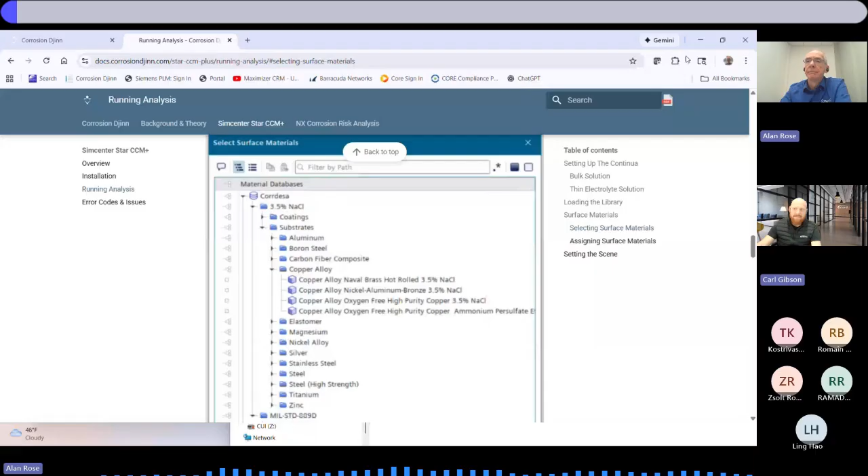So what I wanted to do, I'm from Corrdesa, based in the USA, and that's me on the left. My background is computer-aided engineering, so I've done a lot of computational fluid dynamics, whether it's in nuclear, aerospace, or whatever. And we started Corrdesa in 2011, with Keith, the co-founder.

His expertise is in coatings, materials, and reduction of hazardous materials. We've worked a lot with the Department of Defense on corrosion panel advisory boards to look at strategies for reducing content of chromates and so on.

That's his expertise. And then another one of our partners, Siva Palani, he's from Airbus, Nissan, so aerospace and automotive experience. A lot of experience in electrochemistry and the simulation of electrochemical processes, whether it's plating, electroplating, electrochemical machining, or today we're going to talk about corrosion. So that's a bit of background on our company.

So what I want to do today is share some of the corrosion prediction methodologies and software tools we've developed, as well as hardware and various coating repair processes. I want to try and cherry pick some of these learning experiences to share with you. Hopefully some of it will be new and interesting information.

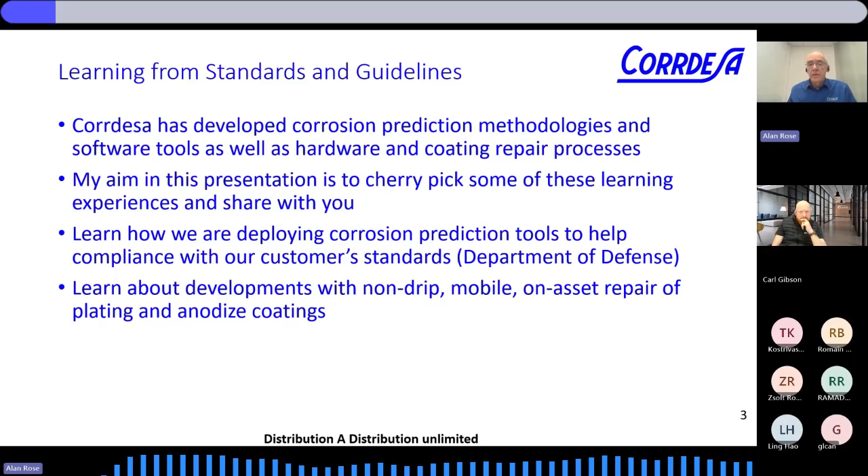On the other side as well, we have sustainment and hardware, and how do we actually repair some of these coatings that we've specified. Thought that might be interesting, on how we're doing on-asset repair. So this is our world, and we have experience in the sustainment side.

I'll talk a little bit more about these little machines here that look like little robots. Essentially, they're mobile machines. You can do electroplating with them. They have tools that are non-drip, and you can take them right up to the asset, whether it's a smaller version in a submarine or on an aircraft, or bring it right up to the plane. But working with our customers, such as the Air Force and Navy, we see a lot of issues.

So it's great to see these actual challenges that our customers have and help them try and remediate those corrosion issues. But many of the issues could be avoided by a better choice of design and materials.

So we developed over the last few years software tools, and we've integrated these capabilities into commercial CAD tools in order to assess and look at corrosion risk very early on in the design process.

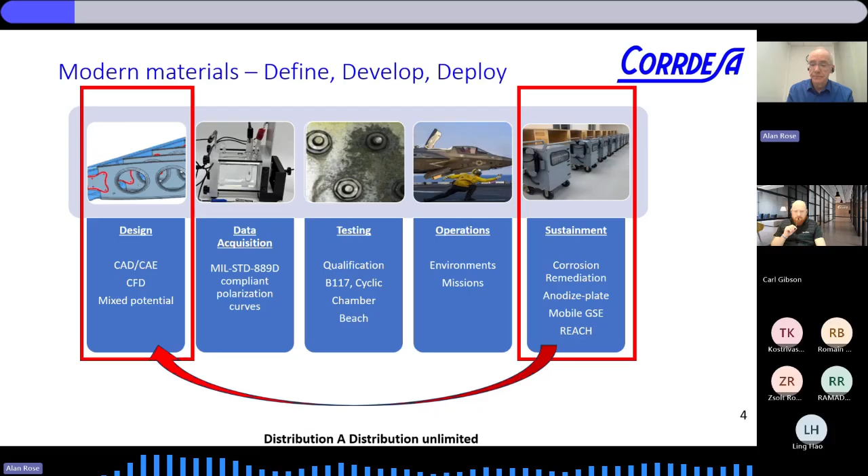Point out these other aspects as well. When we started doing this, we realized, unlike if you're doing computational fluid dynamics, a lot of those properties are already available in CFD software. So that path has been beaten already.

When it came to corrosion, there was very little data to use in our models. So we spent quite a while, we created a panel where we worked with companies like Boeing, Safran, some academic people and federal agencies, and came up with a data acquisition protocol to ensure that the data was gathered in a consistent and robust way. I'll come to that in more detail later on.

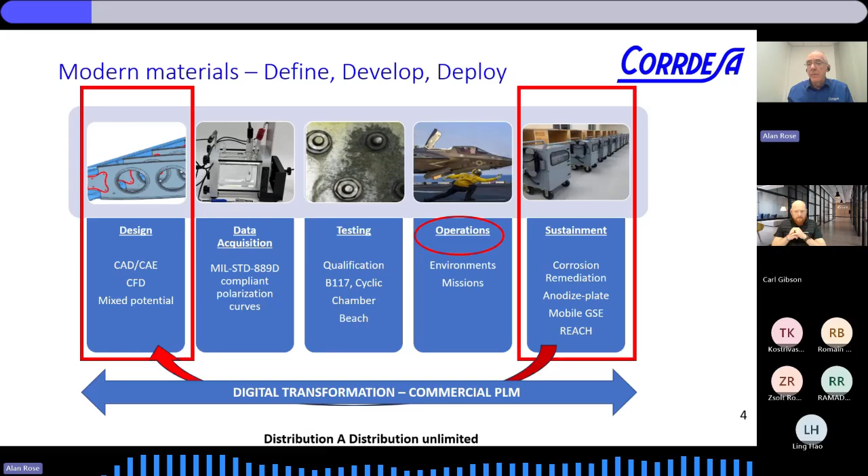So we do a lot of data acquisition. We're very familiar with the testing. We can simulate these testing environments as well. And of course, people work in different environments and also have different missions for their assets, so we've incorporated capability to look at the impact of different environments and different missions.

So it's a big problem in aerospace. It's a readiness problem. If you have an aircraft on the ground, it can cost you a lot of money, whether you're trying to fly your people off to sunny Spain or it's a jet fighter that needs to get in the air at a moment's notice in terms of mission readiness.

Obviously, civilian or military has an impact on structural integrity and safety. And presently we rely a lot on very prescriptive standards and a lot of inspection. I think there's a lot of room for incorporating prediction methodology into condition-based maintenance.

It's relevant also to automotive. We're getting a lot of traction now in the automotive area. They cover their cost in the warranty, essentially. So if they can reduce corrosion costs, that would have an impact on what they spend in their warranty. And there's always an interest in increasing the platform longevity, because they like to use the same platform for different models of cars.

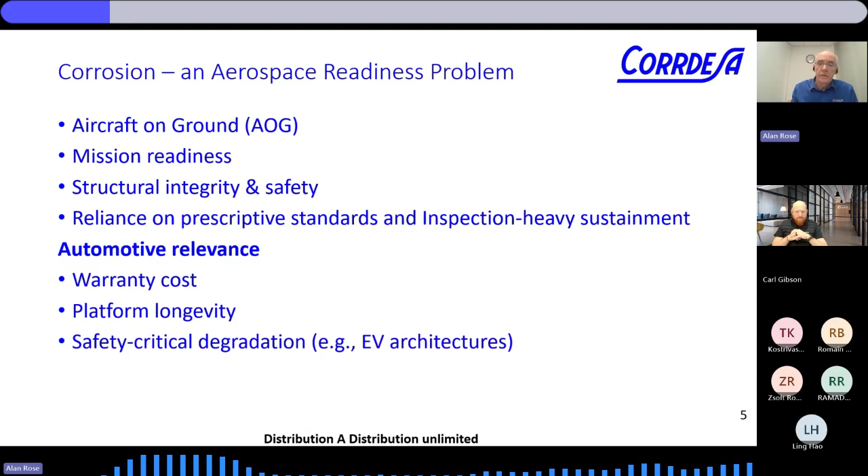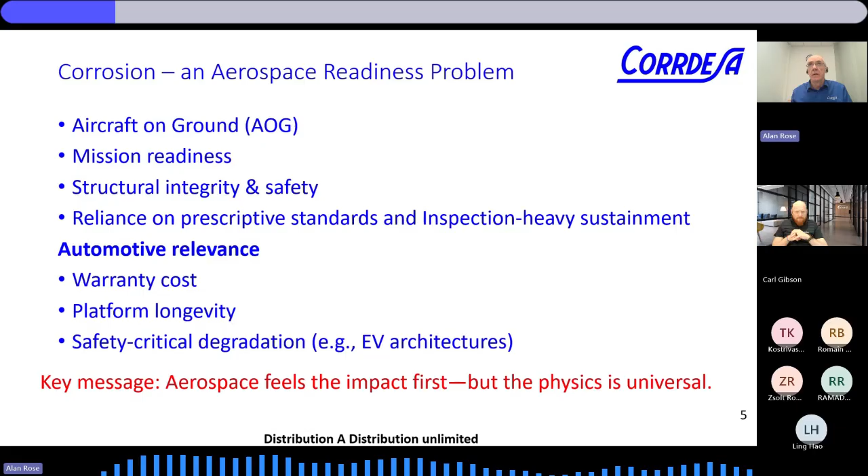And again, safety and degradation of materials. There's new problems with EV architectures as well, stray currents and such. So the key message here is, although we worked in aerospace first and it felt the impact first, in terms of what can we do out of software and prediction, the physics are universal.

So in aerospace, cost of corrosion is huge. Internationally, across all industries, it's huge. And probably teaching you to suck eggs here, you're probably very familiar with these numbers. A couple of things I will pick out is in the FAA, a report said 23% of their failures trace back to corrosion-related issues, which is, I find, quite a large number.

Another thing, when people are always saying, why did this happen? Why was this specified in such a way in the design? 70% of your sustainment costs are locked in by the decisions you make in design. So you need to have the best data you can and do the best job you can in design, because you have to live with them for a long time.

Certainly in the aircraft industry and in the military, these platforms last for decades. And another thing is the coating legislation changes over time. So when we come back into depot maintenance and you want to recoat with cadmium, you might not be allowed to do that. Now you have to recoat with something else, something less hazardous, which has to be tested and qualified, and simulation can speed up that process. It takes more than 10 years to deploy new coatings.

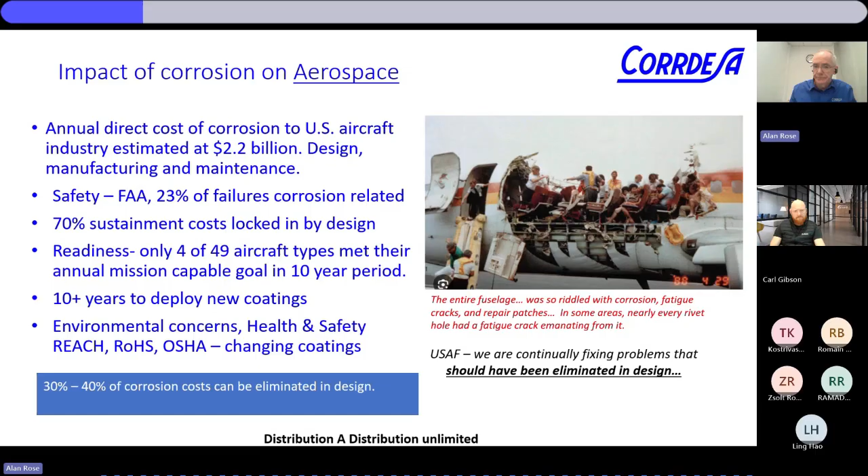So there's parallels in automotive, and we're beginning to get traction in the automotive side as well now. Maintenance cost, a good fraction of maintenance cost in cars is due to corrosion. They have the same issues in terms of changing legislation, meeting REACH, RoHS, OSHA kind of EPA compliance requirements. And there's some new issues coming now with battery casings and connectors and cooling systems for electric vehicles.

So why are we seeing this now? Obviously, in automotive design, they're using very exotic materials, just like they use in aerospace. We're always chasing power, performance, and lightweighting. I have to keep safety in mind, of course, but it's important to reduce the vehicle weight. And also with EVs, the batteries are so heavy. The more we can make use of light alloys and composites, the lighter you could make your product.

But this introduces a lot of complexities in terms of protecting for corrosion, designing those fastener systems in such a way that you don't increase the galvanic corrosion risk. So all these materials expand and corrode differently, they fatigue differently. So testing is the traditional way and is a requirement of physical testing. But what we've done is developed some software methodologies and tool techniques that can simulate these tests, simulate these materials in the field, and can reduce that whole process. I'll introduce some of them to you shortly.

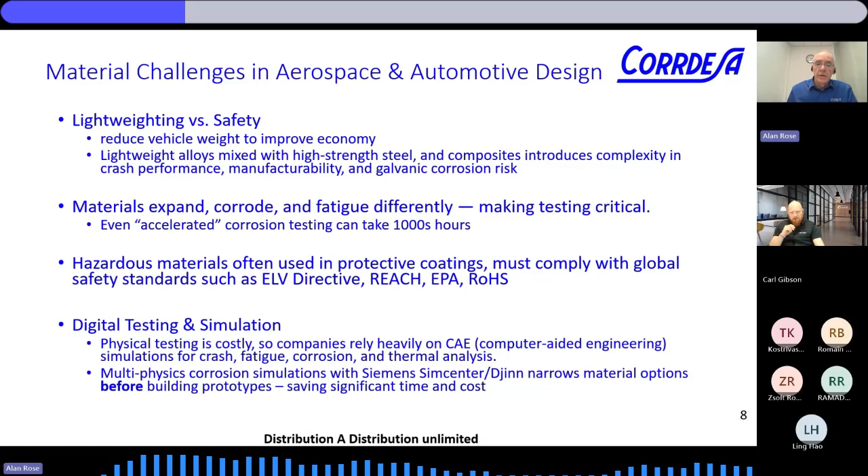You'll have heard of digital transformation. Large enterprises are looking at how they can simulate more, you've heard of digital twins and such, so they can do things quicker, more upfront, shift left. Physical testing is costly, and even if it's accelerated testing, it still takes a lot of time. So I'm going to show you some of the things that we've done with the simulation tools that we've developed.

So often testing happens too late, rules of thumb don't scale. And another thing about simulation is that because you're set up digitally, there's a good auditable trail that you can create, so you can look at exactly what you've done. You can manage all of this process. You've not got your data scattered around in spreadsheets and so on.

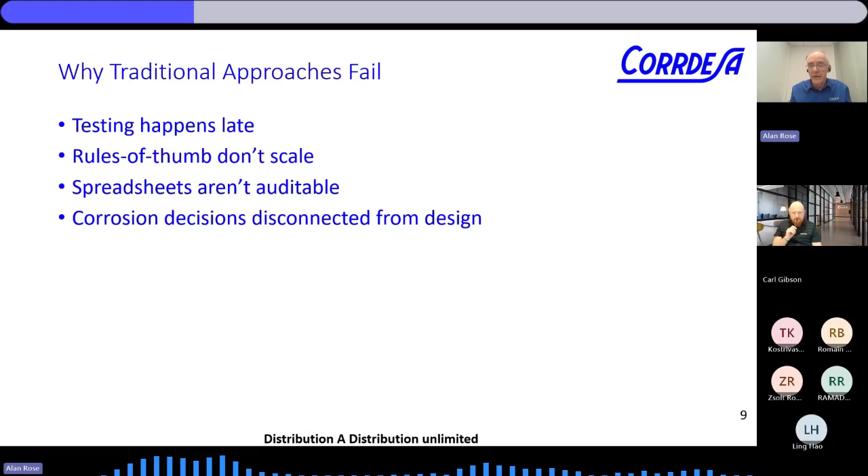So you connect your material choices, and the corrosion risk is connected to the design and travels with that design. So we'll avoid designers flying blind. So here's an example: there are many mechanisms of corrosion.

We started off with galvanic corrosion simulation. The Navy put out a bid, a request actually, for information: can we model galvanic corrosion? Just like thermal analysis, stress analysis, that was the idea.

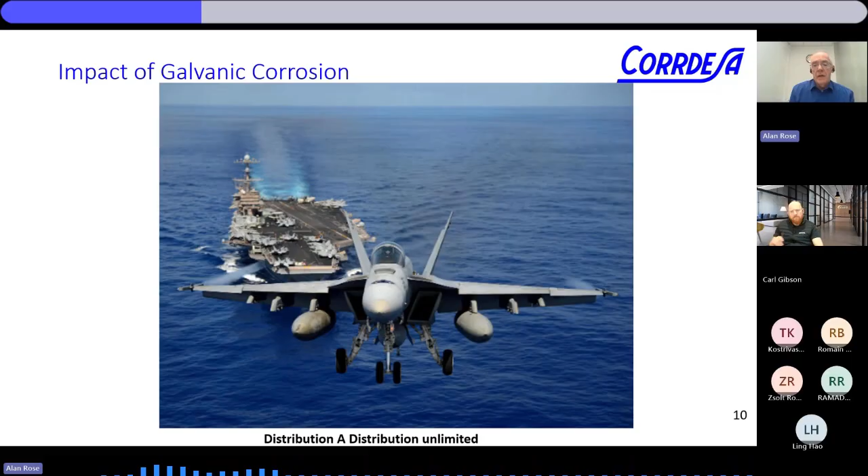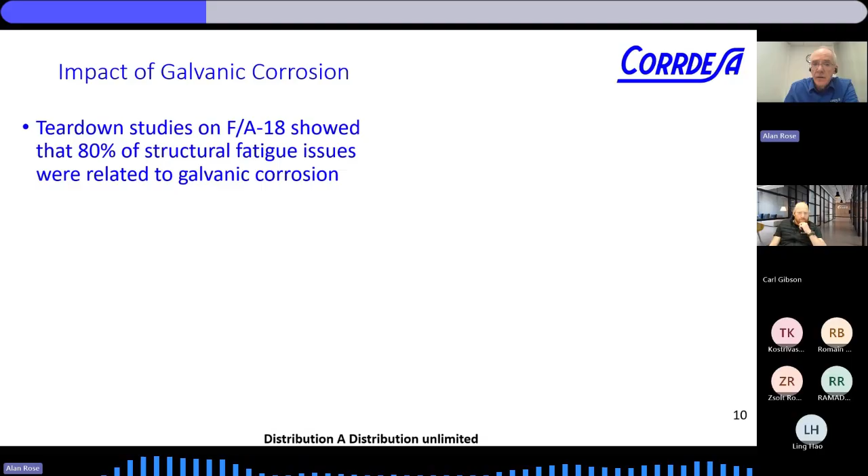And the reason they chose that is just eating the proverbial elephant, it's like, well, what hits us most? In teardown studies on the FA-18 from Top Gun, they showed that 80% of the structural fatigue issues were related to galvanic corrosion. So if you lift the composite skin off the airframe here, you got very nasty corrosion interaction between the composite skin, the aluminum alloys, and the fastener systems as well.

So this led to a real readiness issue, as low as 50%. What's readiness? That means at any point in time, only half of my fleet are able to go and fight. So obviously that was a big event, and there's lots of other issues that cause and lower the readiness, but the corrosion was certainly one of them.

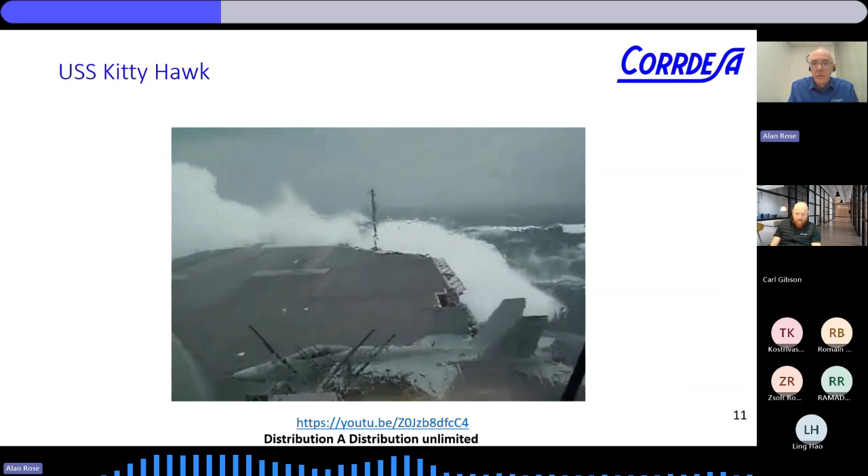And it's not surprising when you look at this, the hostile environments that the Navy had to cope with is kind of mind-boggling, really. They dump tons of seawater onto these helicopters and planes.

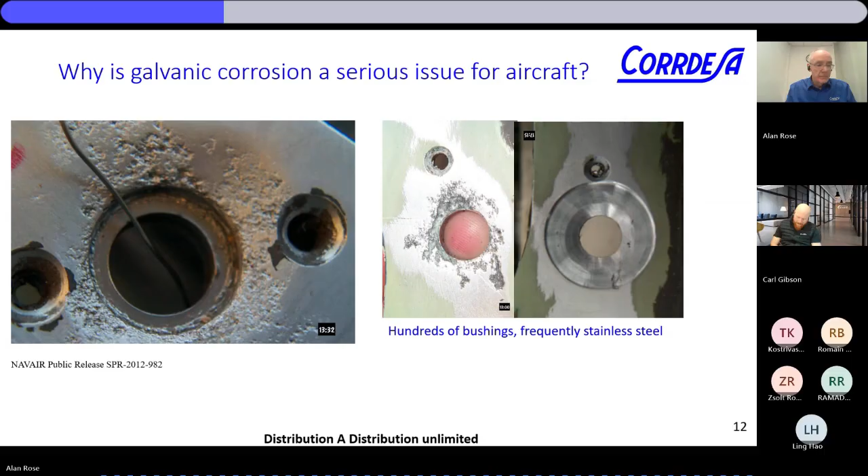So looking closely, this is the corrosion that you can get, and the impact is you have to repair it. So what they do is remove the corrosion, and then there's various different ways of putting a bushing in there to bring back that tolerance. They freeze them in liquid nitrogen, or they Forcemate them in this cold forming process. Either way, it takes labor, it takes time.

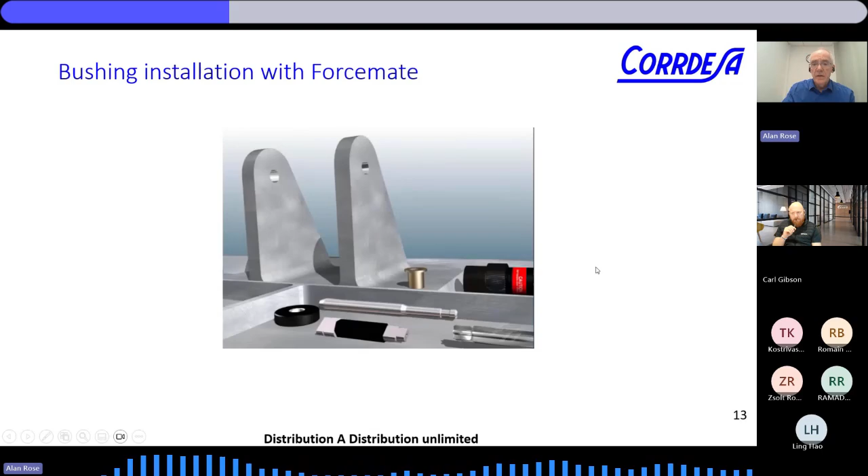And when you consider that there are more than 20,000 fasteners in the center barrel of an F-18, that could be a very expensive process. So clearly they needed to deal with that.

Now the F-18 is quite an old asset, but even the newer assets there've been issues. There's issues with F-35, but on the F-22 there's quite a well-known issue, and that was a gap filler that they chose on the wing panels. This conductive gap filler, which was chosen obviously for low observable type of issues, had unexpected impact in the accelerated galvanic corrosion. And just to fix that one problem cost more than $228 million.

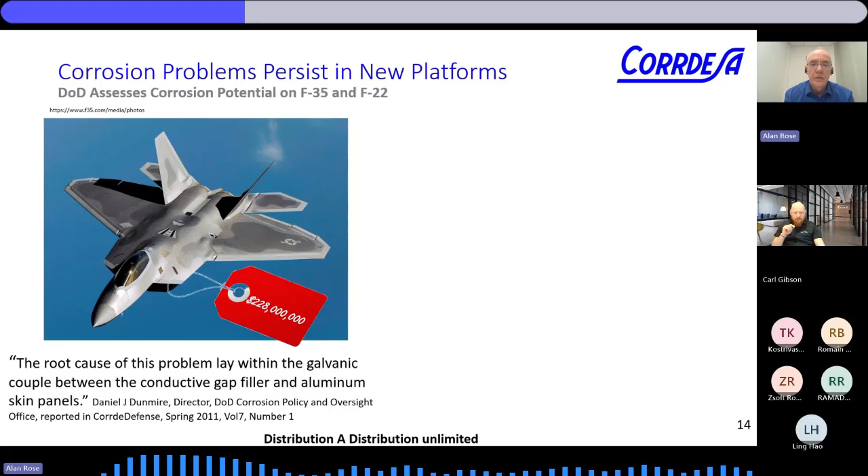So clearly, if you have tools up front, you can look at the impact of these choices of materials, see what the impact is on your total design. We've done this retrospectively, and in the software that we developed, this would have flagged up like a Christmas tree, and it would have been a non-event. We would have dealt with it and worked in an alternative material.

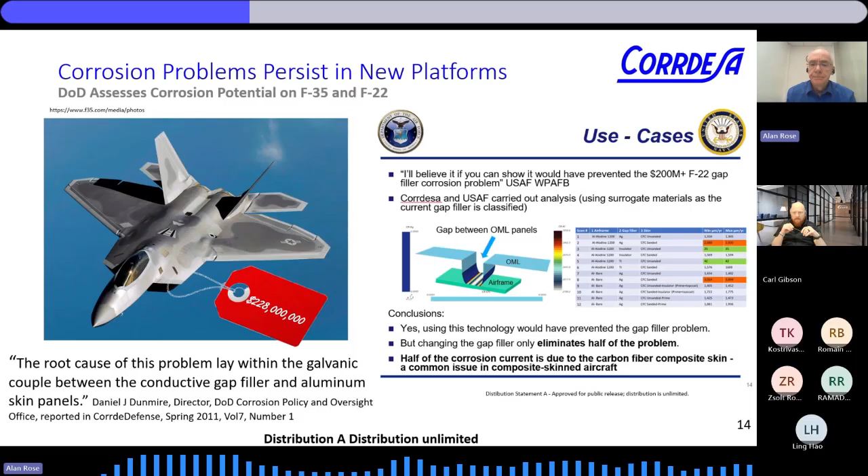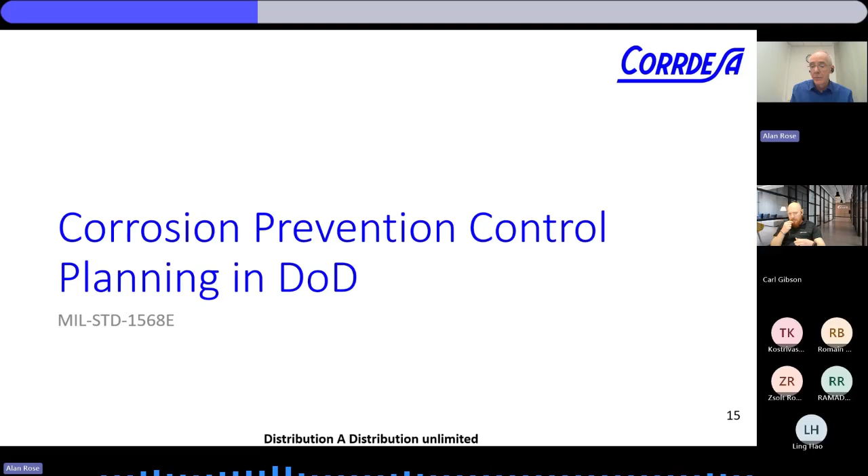So, talk about the corrosion prevention control planning. I'm becoming more familiar with the standards here in the UK, but in the US for military acquisition, there's a requirement for corrosion prevention control planning. It's covered by this MIL standard 1568E. All the standards are publicly available. And the key points of this, I'm not going to get into the details of this particular standard, but I think of it as a bit of an umbrella type standard.

It's interesting to note that it is law. It comes down from US code, and it is law to have this corrosion office in place. And in order to meet the law, they create the policies, these DoD instructions, and then from these DoD instructions into the hands of the engineers, they have the MIL standards to follow in order to trickle back up and meet the requirements of the law. So that's quite a big compliance issue for the OEMs, and they have to show and substantiate what measures they've taken to assess any risk in these systems and why they've chosen those particular materials or coatings.

So we'll drill down a little bit now. There's a multitude of MIL standards. There'll be equivalents, surely, in the UK and Europe. The MIL standard 1568 calls out and refers to 889, and that's for galvanic corrosion, which is what we're going to talk about in more detail now.

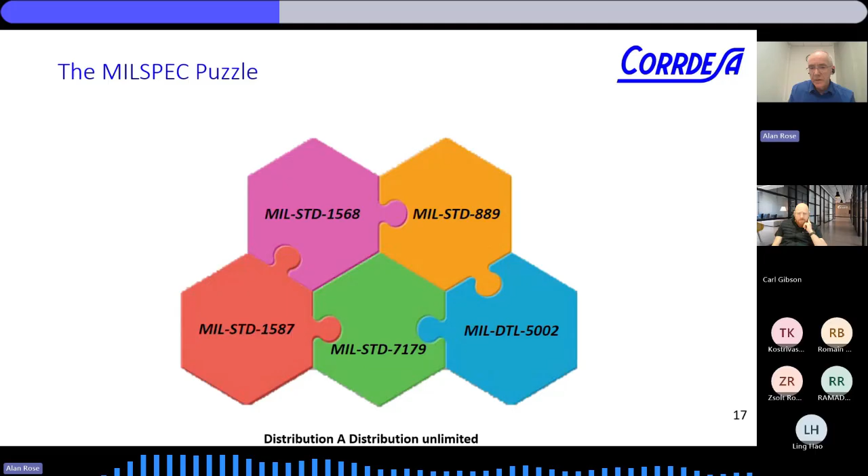So a couple of points to note. These are the standards. The 1568, in there, I pull a few clauses, and it says modeling and validation testing shall - it's not may, it shall - be performed to identify corrosion-prone locations. If it's a new system, how are you going to do this a priori? You can't extrapolate all the time successfully from your previous experience. And it says testing. So in my mind, computational fluid dynamics, computer-aided engineering - testing could be physical testing, which has its own limitations, and also virtual testing, which also has its limitations.

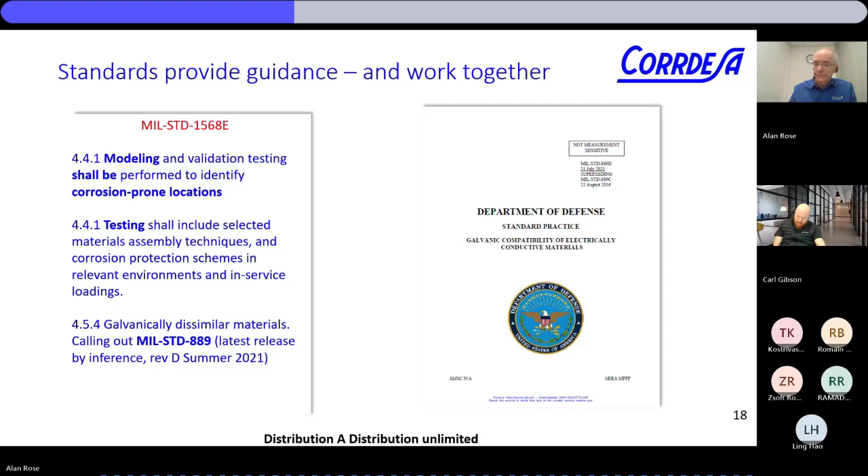And then there's a requirement to look at galvanically dissimilar materials and coatings. And the big change is the MIL standard for galvanically dissimilar materials used to be based on a potential series, but now they've changed the way that they look at it. It's a requirement that you use polarization curves. So if you're familiar with polarization curves, we'll talk a little bit about it in a minute. But you have to use polarization data. The reason being, it's more accurate in this way.

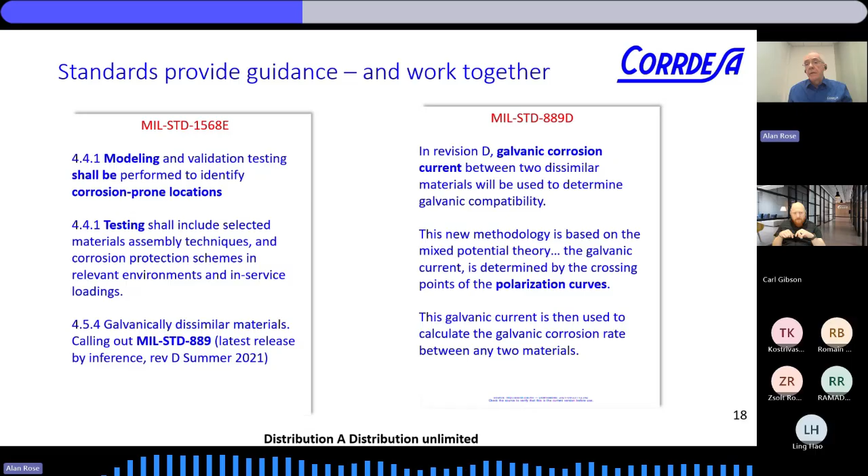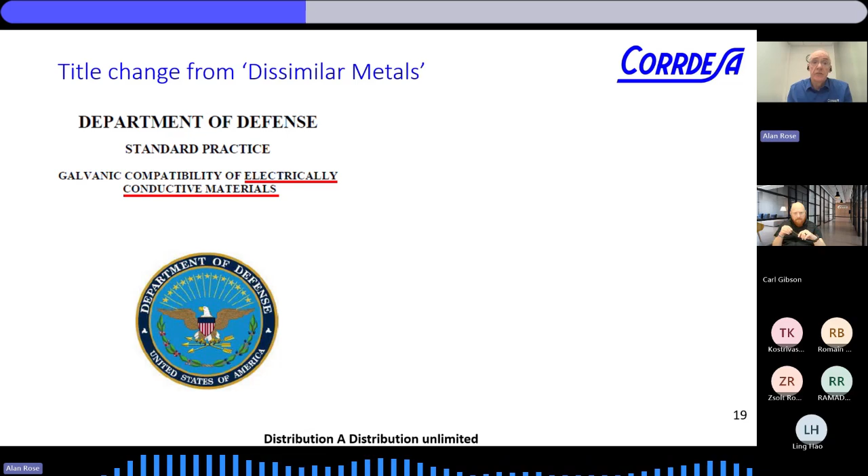To change the galvanic dissimilar metals was the title, and now it's called galvanic compatibility of electrically conductive materials. So this is another change because it's not just metals and alloys, coatings, but it really matters - you've got to be cognizant of the composites you're using, the conductivity of the gaskets and the sealants and the gap fillers. So it's much wider, a broader selection of materials that come under this.

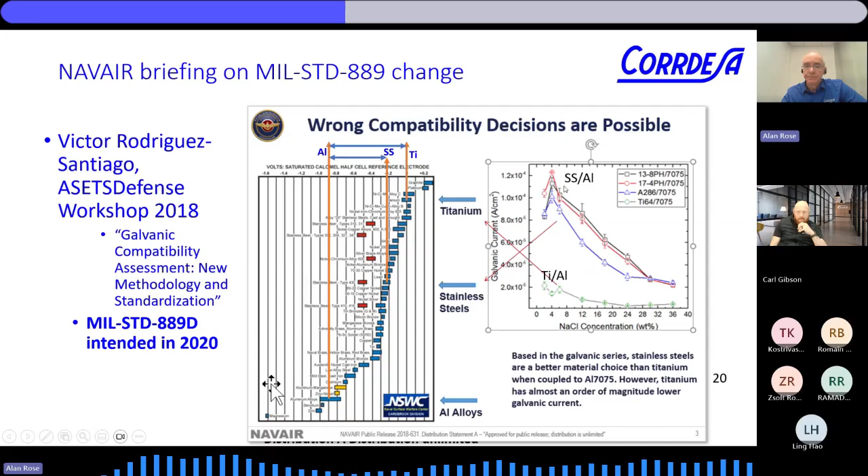But if you look over to the right, if you actually make these couples and you measure the current between them, which is proportional to the corrosion rate, you find that for stainless steel and aluminum couples, the galvanic current is much, much higher. So you can't really have a standard that's driving you in this wrong direction - that was the impetus behind it all. And this is what they were seeing in reality. You get a test coupon or you look at a real system - we have titanium fasteners here on an aluminum plate, and we have stainless steel fasteners, and it's actually that corrosion of the aluminum plate is accelerated by the presence of the stainless steel.

And now the standard has changed, and if you use the polarization curves, you can do 3D calculations of this corrosion and calculate this map. I'm going to show you a couple of tools that have developed from this.

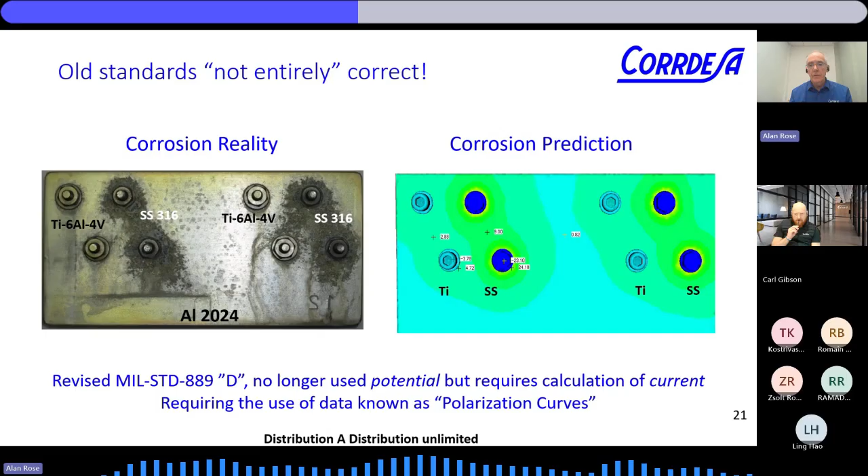Military standard 889D doesn't use potential anymore. It is a requirement to calculate the corrosion current, and they do this through the polarization curves. So what they did now is pre-calculate measured polarization curves for all these materials.

This is in the standard, and it's just like in the old days before sat-nav. If you wanted to know how many miles between London and Manchester, you would pick one town on the left and pick a town on the right.

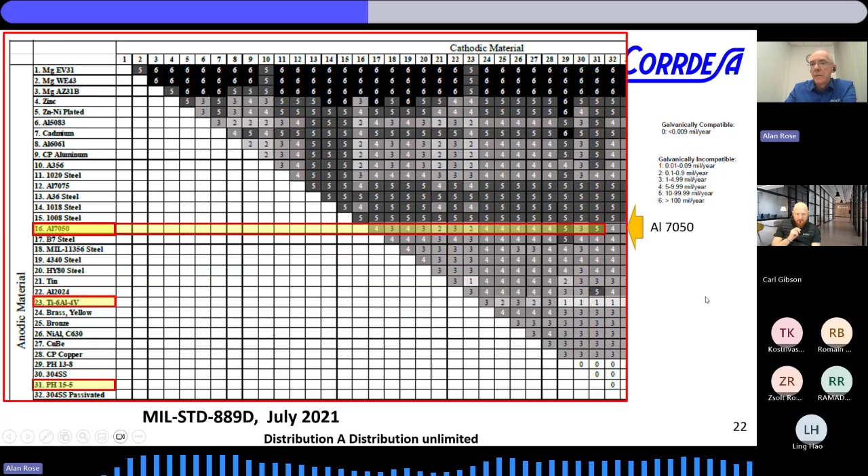What we've got here is all these numbered materials are repeated across the top. So I have aluminum 7050, I've got Ti 64, and I've got PH 15-5. We just look across here for the 7050, and then we drop down with our expected couple of the Ti 64 and our expected couple of the PH 15-5.

And you'll see these categories. Category 2 for the Ti 64, and over on the legend, you've got the mils per year range. This is a logarithmic range, you have to look out for that. So now, this is in line with reality.

Problem: the day this is printed is the day it's out of date. And anticipating that, in the appendix to this mil standard, we helped with this piece, defined a protocol for measuring that polarization data. So if you have a new coating, because new coatings appear all the time, there's a process by which you can measure that and then combine it with the data available here. So there is a way of continuing.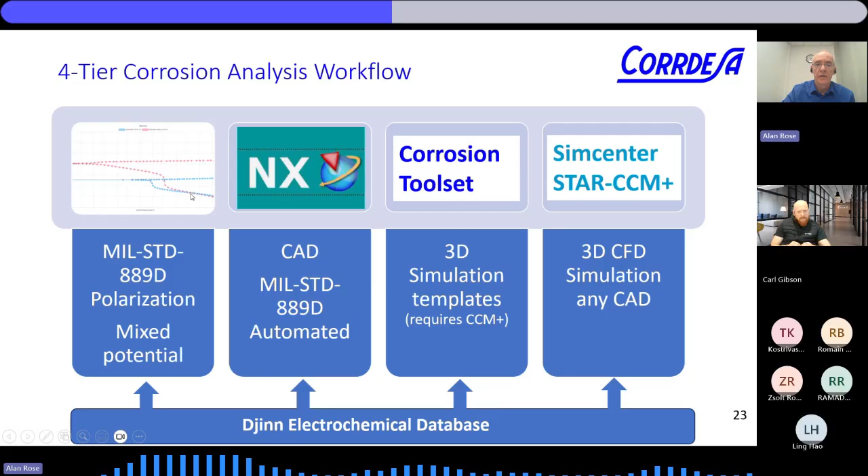So what we've done over the last few years, that was quite a few years ago, we created a SaaS software, Corrosion Djinn. It has all of that data in there, and it has data for different environments. What this essentially does is, using mixed potential theory, if you have the polarization curves of two materials in your couple, then crossing the anodic of one branch with the cathodic of another branch will give you that corrosion rate. So that's our starting point.

And then we incorporated this capability into a CAD system. So in the CAD system, the CAD will automatically look for all of those interfaces and apply the mixed potential theory to all the materials either side of the interface and come up with a color code table of your corrosion risk inside of that CAD file.

Then if there's anything risky in there, you can change the materials within the CAD system. If that doesn't remove it, maybe you need to do a redesign, and then there's a way of looking into the details.

So you can import the 3D CAD into your CFD solution, and we can solve for the corrosion rate. And you can get a corrosion rate map, so you can see the gradients as it changes from high to low corrosion rates over your assembly.

Now, one problem in terms of when you think about the people that use these: do you teach your materials people about corrosion? Teach your materials people about simulation, or your simulation people about corrosion?

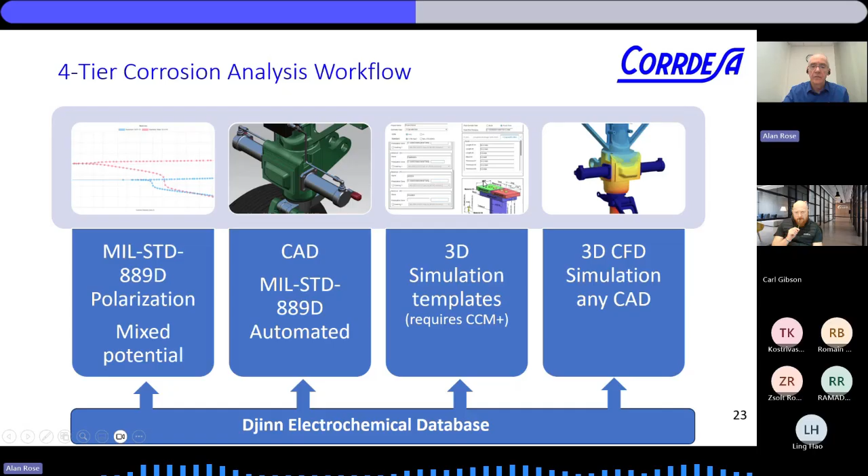And for the materials and process engineers, we also produce kind of a middle ground here where you could put in dimensions, and there's a certain number of templates that can be picked. Very quickly, this is all automated for certain fixture systems. I'll show you that in a minute.

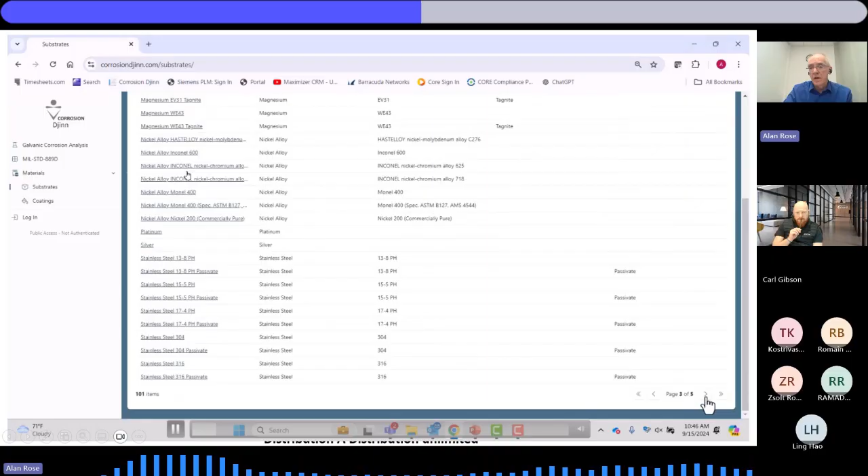So what you can do is you can go to something like corrosiondjinn.com, for example, and you can look at all the material information. What we have, you can see, is quite extensive. And that can be added to because there's this protocol for gathering that data.

So you can look at substrates and different coatings, and you can play with this yourself for a selected number of materials. But essentially, we choose an environment. We have the mil standard environment, which is in artificial seawater, or we have a 3.5% sodium chloride environment, which the Navy were interested in. And this is like a requirement. So early on in your design, you can choose aluminum, different kinds of versions of it, different tempers, whether there's a treatment, whether it's anodized or not, how it's sealed.

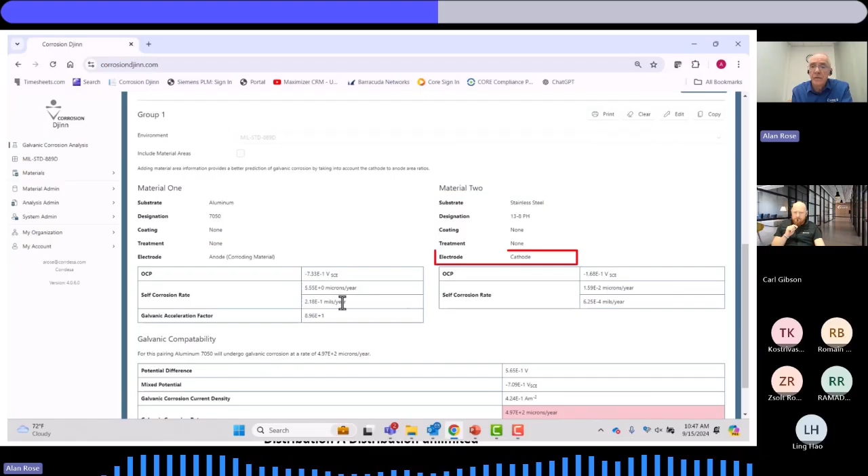We have curves for many of these different options. Like the stainless steel here, the 13-8 PH we chose, you run it and it pulls the polarization curves, and then it has a summary underneath. It will tell you what is anodic, what is cathodic, and you get the self-corrosion rates of each of the materials as well. The big kicker is even though you can have a self-corrosion rate that's really, really low in isolation...

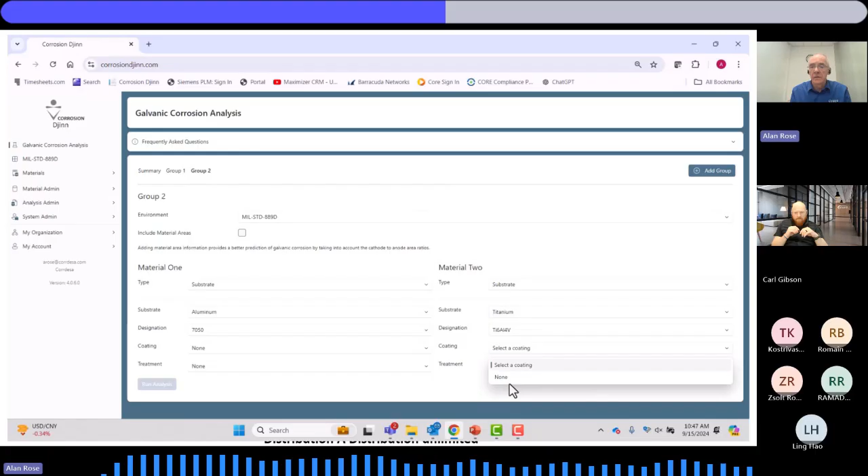When they're together, you got 497 microns of corrosion, a very corrosive couple. So you can quickly copy that group, it self-populates, and then you can say, oh no, this time I'll try titanium, and then put in zinc nickel, and you can very quickly go through those options.

So in a very short time, I've just got a summary of it here. I looked at aluminum, thinking stainless steel fasteners or some part of my structure, aluminum with Ti-6-4, like we talked about earlier in the Navair example. And you can see very quickly what that corrosion rate is.

Now, maybe it's cheaper to just coat your fasteners, like a zinc nickel coating, a sacrificial coating. So here it's swapped around, and now the aluminum has become cathodic, so it's not corroding. That's a good thing. And the corrosion rate is really kind of a consumption rate of your zinc nickel.

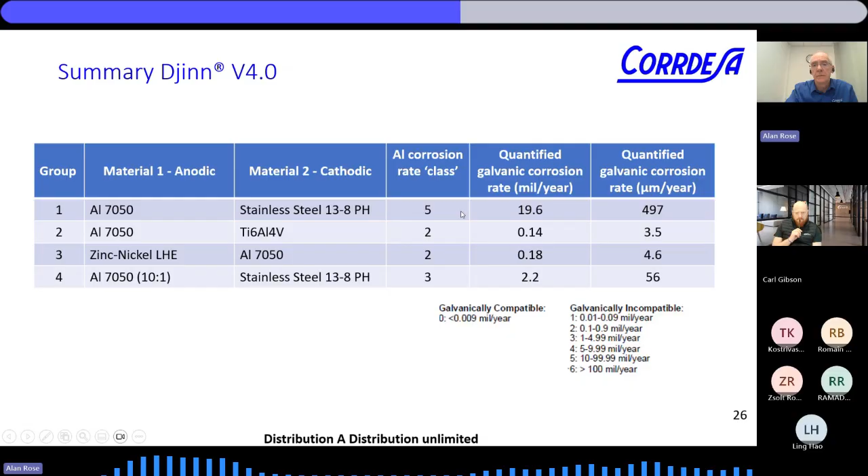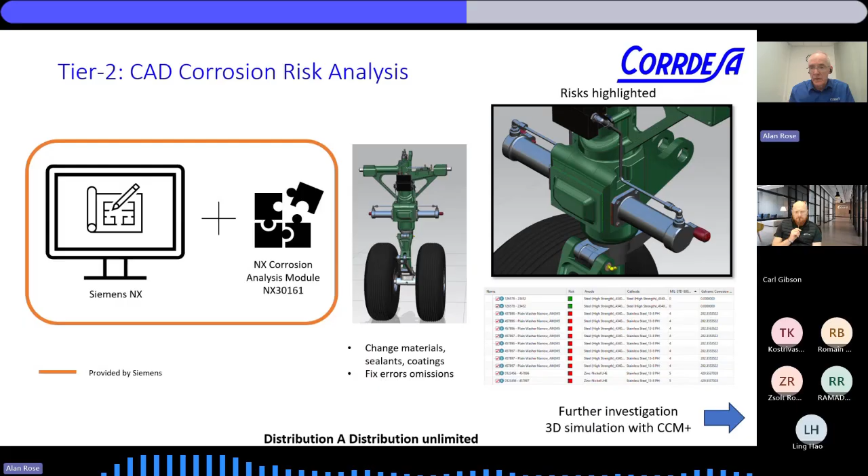So you can see how you can do that pair by pair, and it's still quite fast. But if you have a CAD system with your bill of materials with all the coatings already assigned, which can be done, then within that CAD system you can just press a button and it will give you a table down here and tell you what the corrosion rates are.

So this is the way it can be deployed. Very early on in the design process, you can choose your environment again. You can just choose a few fasteners or a subsection of your geometry, or you could choose a whole geometry. You just press calculate corrosion, and it's really automated, that mixed potential theory application applied using the mil standard way of assessing corrosion rate.

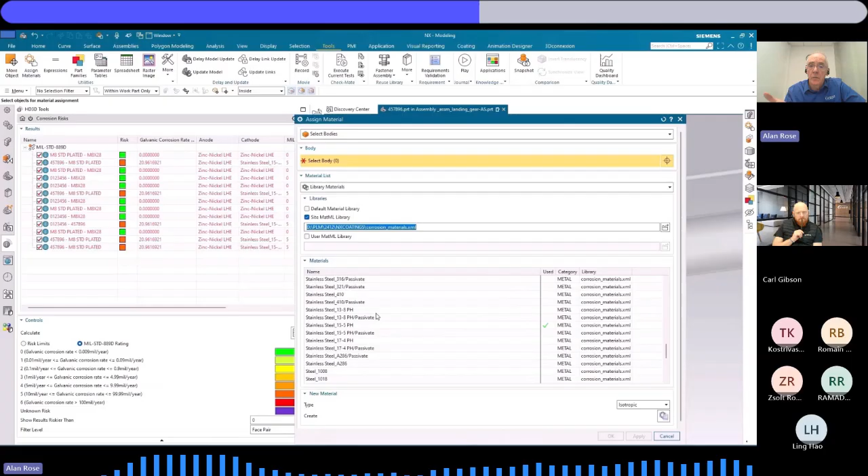So it's great because then you can home in on the piece that may be causing you issues. You could just do a change of coating on the fly. We're looking here at the difference between 15-5 PH and whether we passivate it or not, and you can halve the corrosion rate by just passivating it. Well, you can halve the consumption of the surrounding zinc nickel by passivating that stainless steel piece.

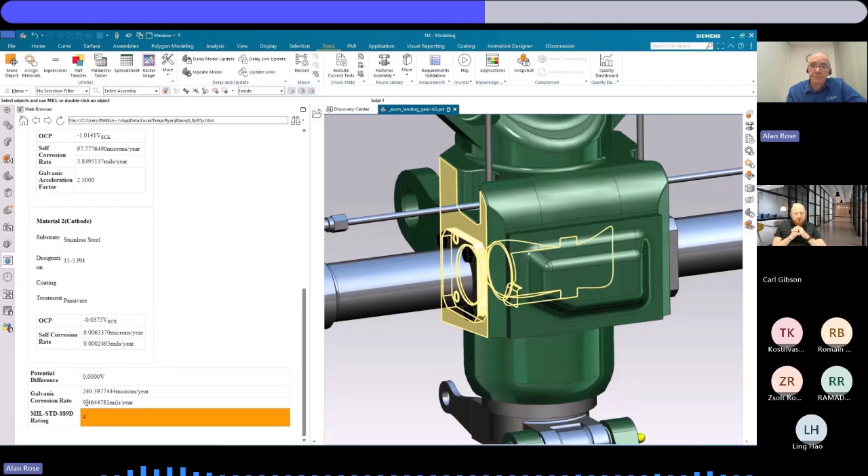And then it's really good that now they've decided that polarization curves are needed to get a more accurate handle on the corrosion rate. You cross the curve and you're just using a fraction of that curve, where that intersection point is, when you look at that table of pre-calculated corrosion rates.

But if you use their polarization curves as boundary conditions in a 3D model, you can simulate and solve for potential and current density. It's kind of like temperature and heat flow. You can actually solve for that and you can get the corrosion rate on all your different materials.

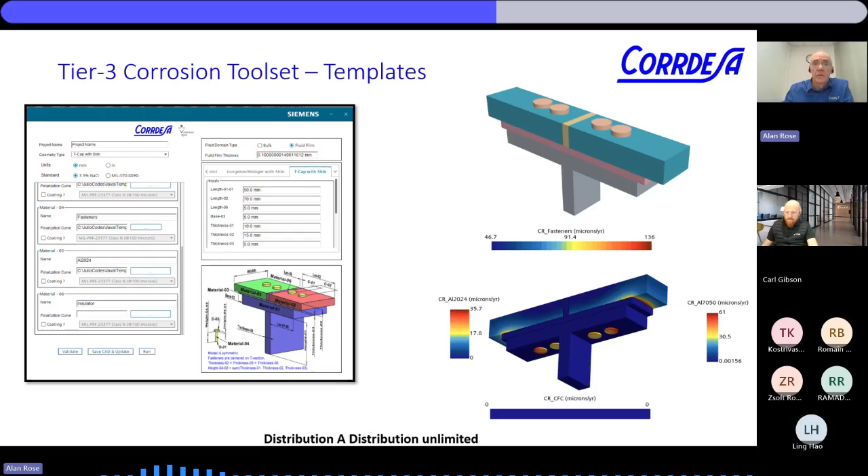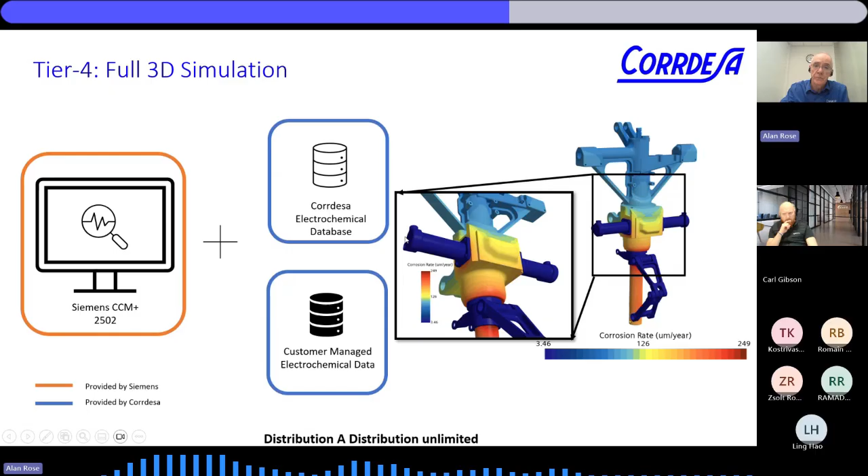So that same data is being leveraged and deployed again, but now into a 3D framework. We're using computational fluid dynamics, but we also solve now for corrosion rate. We can read in our database all those polarization curves, and it's available within the software, so you can set up your simulation tree. We have surface materials here, and here you can see that Corrdesa database with the coatings and substrates all available, just to be quickly assigned to those surfaces of the geometry that you're considering.

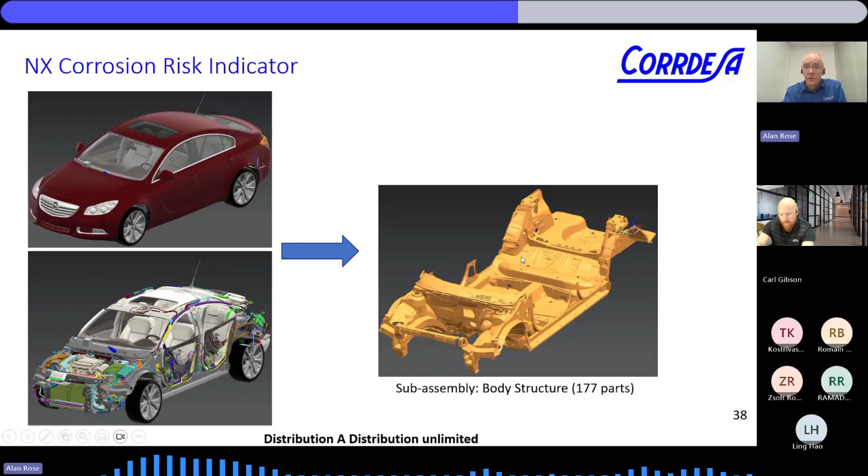So the workflow can be, let's look at the structure. It's very complex. Let's get down to the body in white. That can be a mix of different materials, so the different materials can be assigned, and that will flow through from your BOM.

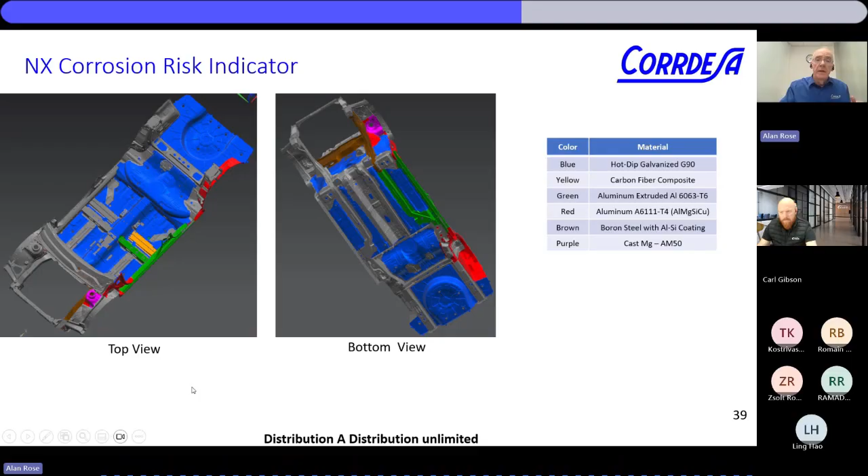Press a button and you get all these corrosion highlights. You might be able to fix them by changing materials, deciding to coat it or coat it with a different brand of coating. Some things might need more of a deep dive, so you have this table, you can say, okay, let's look at these couples here and zoom in on them, create your 3D model and do a deep dive.

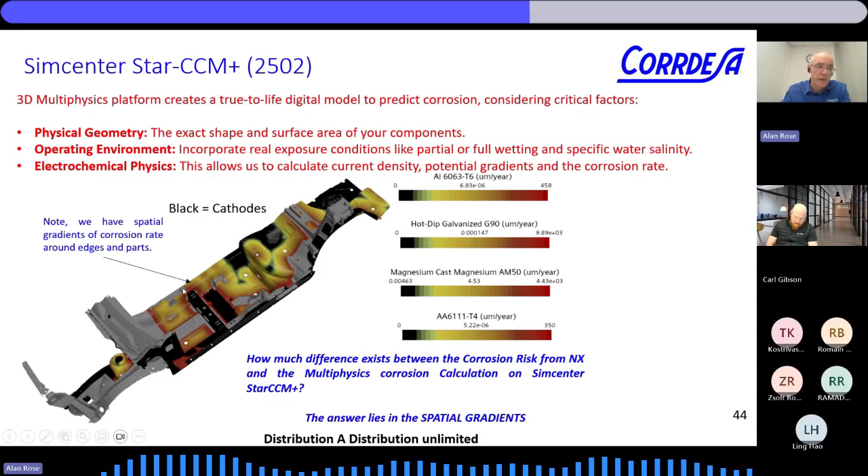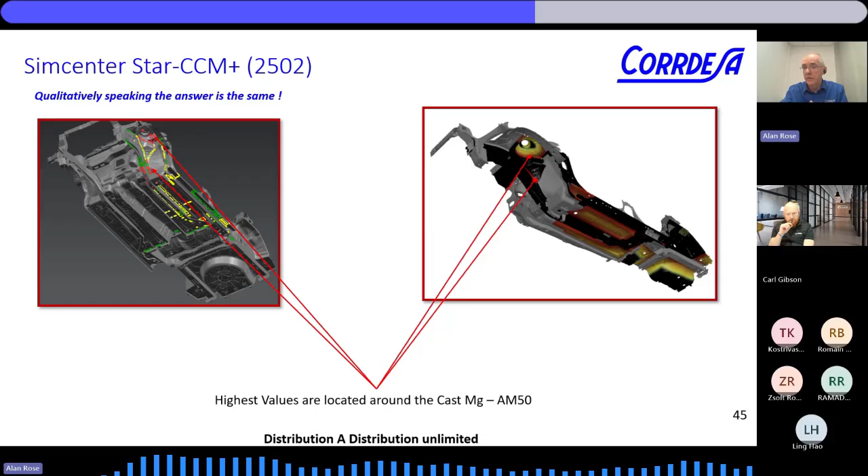So now, rather than just numbers, maximum corrosion rate, we can see how that corrosion rate actually flows and changes. We've got risk on the left and deep dive, the actual corrosion rate map, on the right. And it could be higher or lower because now we're capturing the actual geometry. So the anode-cathode area ratio of 1 is not an assumption anymore, we have that geometry information.

So although the corrosion rates were higher in our risk analysis, they all trended in the same way. In our risk analysis we got a high corrosion rate, but it's just telling you where the risk is. But then you take it into your 3D model and solve for the current density, and it ends up being lower because of the different areas and shapes of those components.

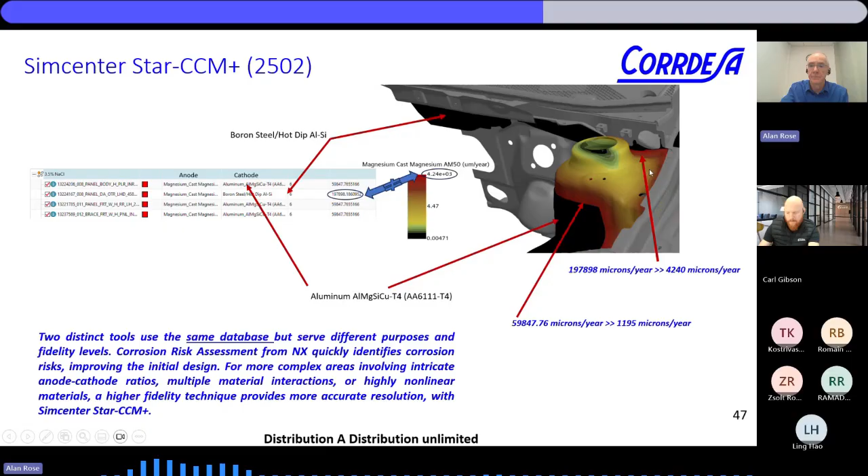But I find the simulation bit, trying to figure out shift left, do more and more in the design. I just thought it might be interesting to touch on some of these. Sometimes you might want to change the coating. How are you going to do that on an asset that's already out there in the field? I thought this could be interesting to some of you guys.

If you're familiar with selective plating, it can be very messy. You can flow your electrolyte through here. You electrically connect what you're plating, the workpiece, to your electrode here, flow the electrolyte through, and you can locally plate.

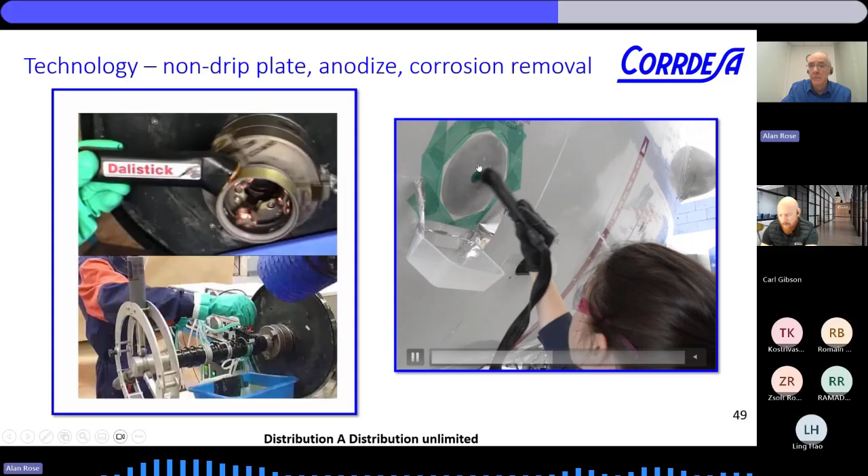And there's a non-drip process that does this, so we leverage this non-drip process. It's really quite interesting. They didn't believe it was non-drip on the side of this very expensive sub-hunter, it's a P8. But we did an anodized process actually on the plane. It came into the depot, we fixed it, and then it was out on patrol. So in terms of readiness, it was spot on. I thought it'd be interesting to tell you a little more about those processes.

It's interesting, the electrolyte is supplied to this tool through these little holes here, and then there's another pump that creates a vacuum that sucks back that fluid. It just soaks this porous material just enough for it to be wet and complete the circuit, and then you move this tool about on your workpiece. That's essentially how it works.

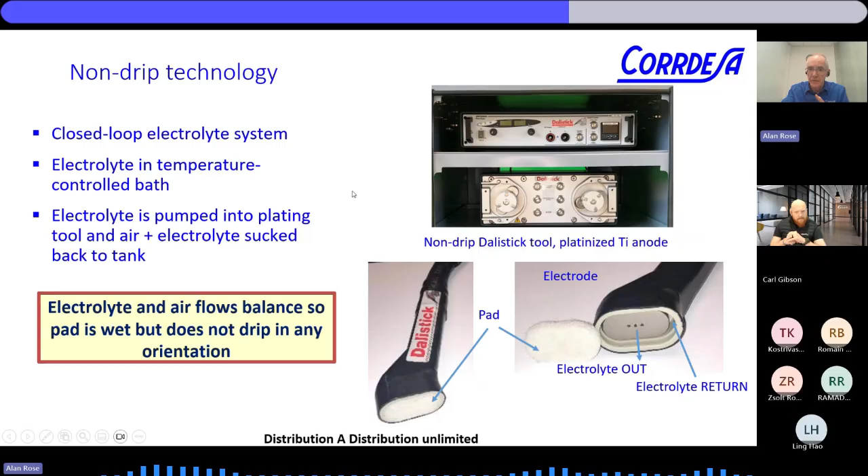And what we did was we packaged this. There was a lot of things we had to do. The idea was to bring this to the flight line, so it had to be very robust. It goes on aircraft carriers, it had to withstand rocking around on ship and so on. But essentially this is sold all around the world now. The F-35 uses it, and we're only a small company, so we're very pleased about this.

And you can do plating actually on the airframe. So now we've been training people all around the world, we've trained over 100 people on this use, and we use this also in the UK.

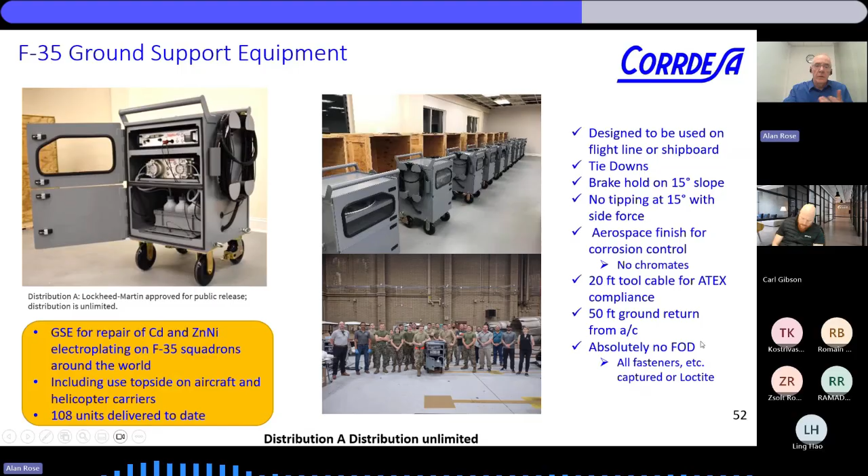Okay, so we took this further. What we did then was develop a system using the same non-drip approach, where there's actually corrosion. This is a U2, just an old spy plane, a lot of corrosion on there. And we developed a way to remove that corrosion, replate the fasteners, and reanodize the damaged aluminum around the fasteners.

This is a more complex process, so we're putting a computer interface there because we're doing an electrolytic strip with one tool, and then we stop. The computer tells us when to stop. Then we do an anodize, anodizing the aluminum, and that essentially masks around the fastener. And then we do a zinc nickel over the previous cadmium or bare fastener, and then passivate, seal, and rinse, all basically on a mobile system.

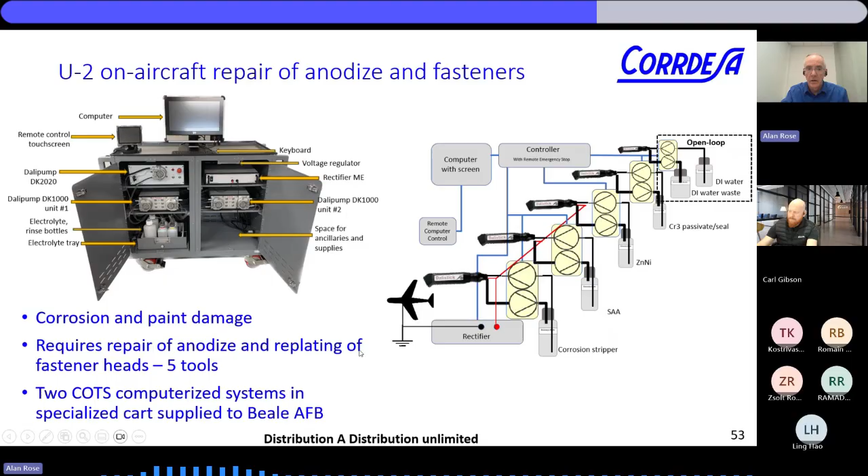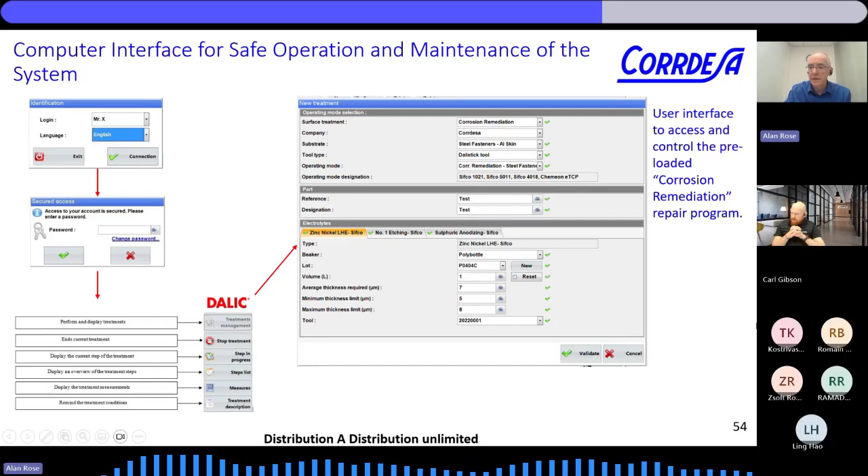Computer controlled, because you have to walk the technicians through this. Also, being in the military, the technicians are often stationed there for only 18 months or 2 years, so there's a lot of churn as they move around. So you have to have a system that people can quickly get to grips with.

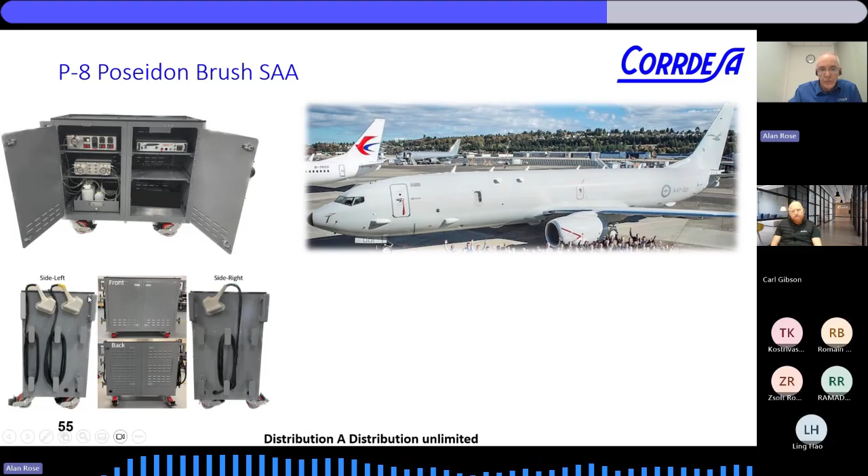But the thing is, it's always been a small tool. You can just do small repairs. And we did a lot of research, and over a year ago, we eventually managed to solve the challenge of making larger tools, but yet non-drip. So you saw the movie there where we're working on that static port here on this P8 Sub-Hunter. That was our demo. And now we've created larger tools where we can do much larger areas of anodizing repair actually on the asset, on the aircraft itself.

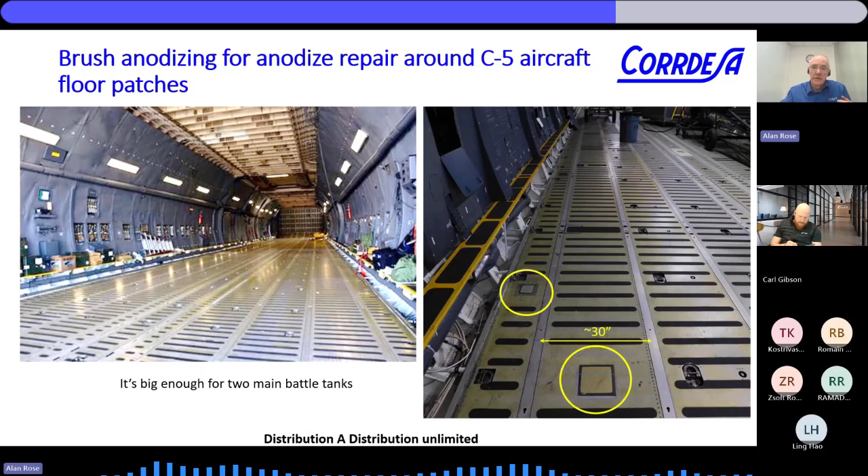And we're taking this to larger aircraft, C5, that's a Galaxy, it's really big. And it's huge. You can walk in there, you can fit 2 tanks in there. You can fit a helicopter in there. And you can even play tennis in there, it's big enough to play tennis.

Also, it's interesting, from stern to the front of that plane, it's longer than the first ever powered flight by the Wright brothers. So they could have completed the takeoff and landing within the length of this plane.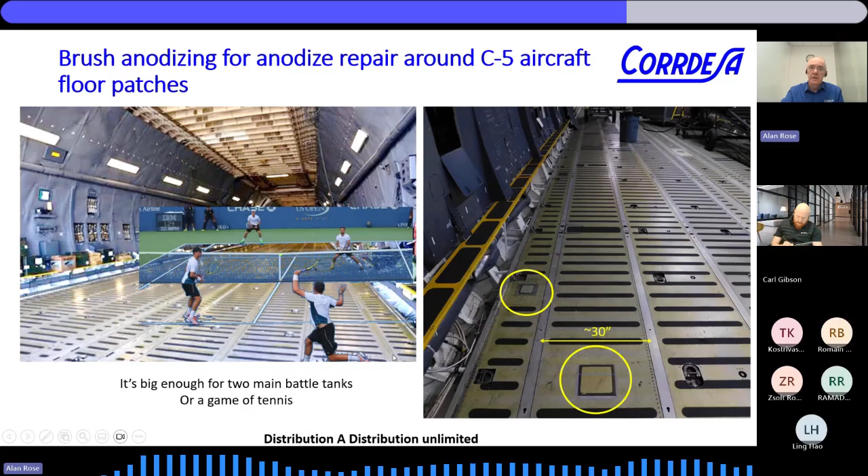And with all this equipment, the floor gets damaged, and this in-tank anodize is really tough. And when they put a patch on, there's a standard repair for putting the patch on - they damage the anodize because they have to adhere the patch to the floor. So the anodize gets damaged, and they wanted a way of repairing that, and that's what we did. We created a repair for that.

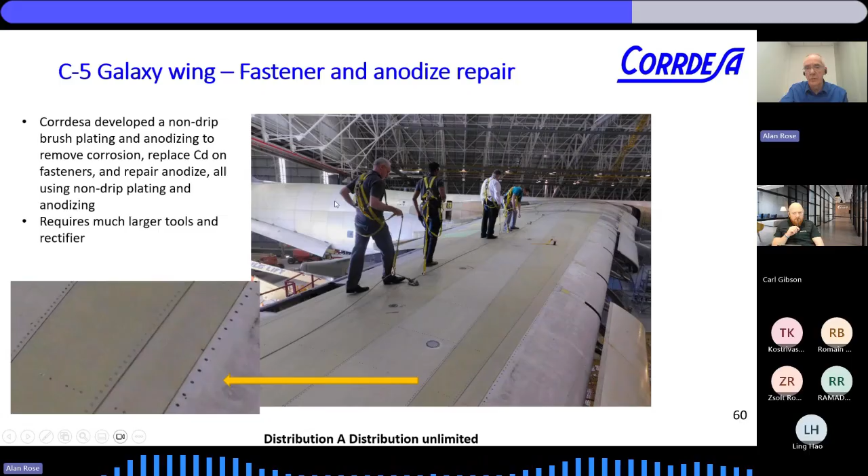And also, they had another issue on the plane, on the wing plank. There are fasteners that cannot be removed, so that was a problem - how can we fix these corroded fasteners in place? And again, this is like a huge wing. You can play cricket on there if you decided to, although you have to be careful.

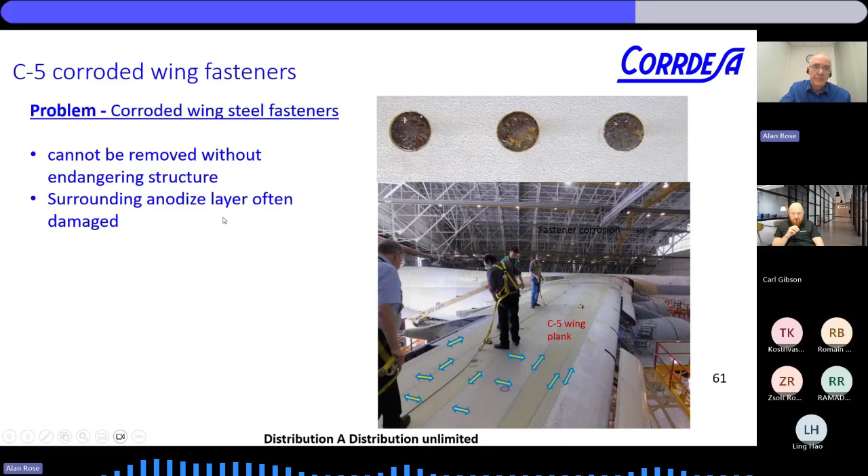It's pretty high. Anyway, so what we did then was similar to that U2, but we've got larger tools. So you can see the corroded fasteners here. We've stripped the cadmium off there - if there's any left, it's often completely gone by then. We can't coat with cadmium. It's possible to do it, but of course, low hydrogen embrittlement zinc nickel is now what we're replacing it with.

And then we reanodize the aluminum, because what they found is that in removing the corrosion, the technicians essentially were putting abrasion material on the end of drill bits and damaging the actual plane as well.

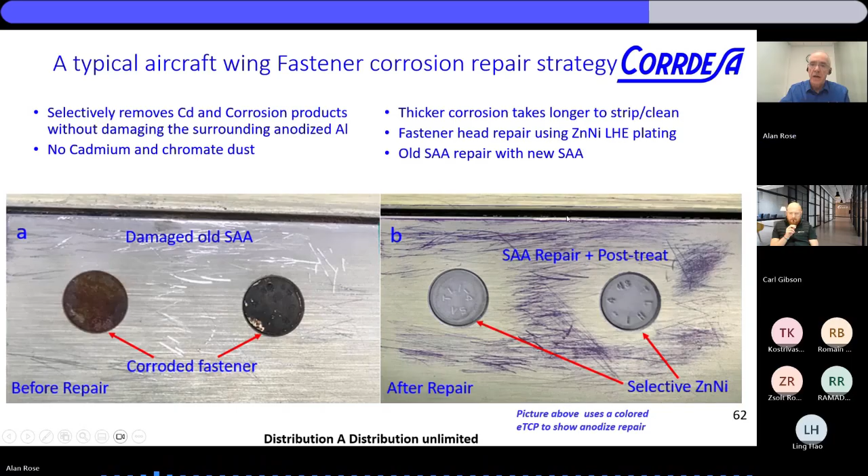So here you have corroded fasteners. This was a test, and after doing the stripping, replating, reanodizing and seal, it was colored so that we know that it had been reanodized - the pristine here. So this can all be done actually on the aircraft.

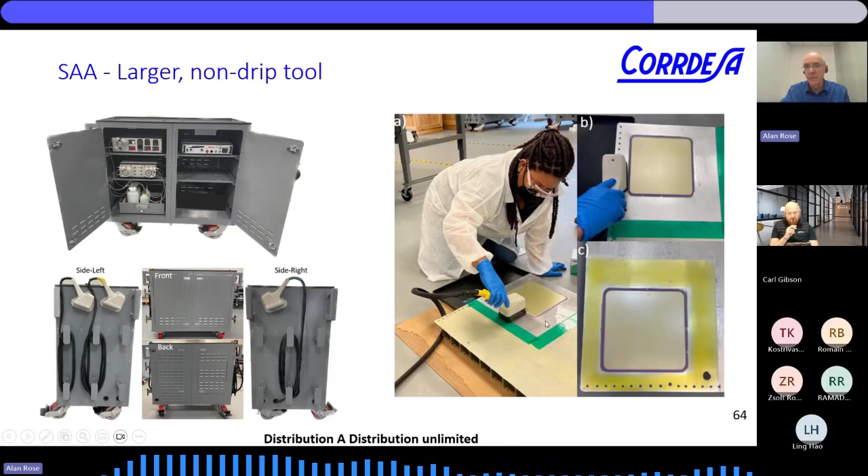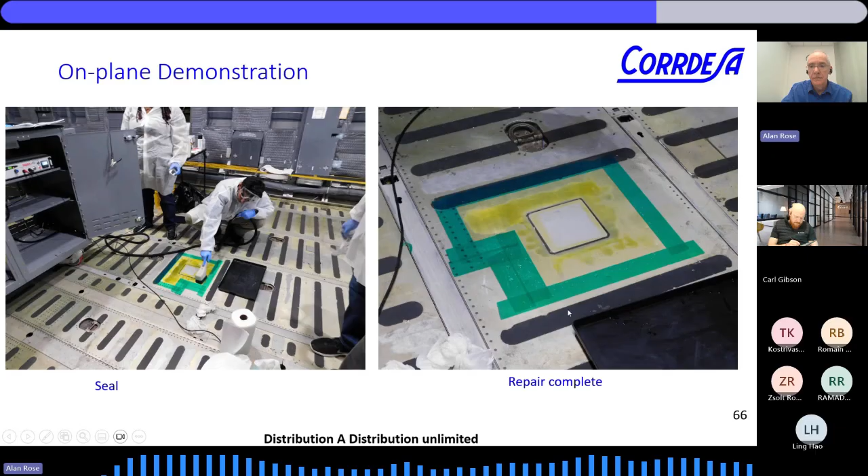So a couple of years ago, despite all this development, you have to do it on the aircraft, and that's exactly what we did. We created this equipment, we tested it on real pieces in the lab, and then we actually went on a C5 Galaxy during the repair process, did the prep in situ, the anodize, the seal, and we have a complete repair, checking the integrity of the repair. So now the standards, the tech orders are being changed in order to accommodate this solution of anodize repair on the asset.

Back to the software, I could just point to a couple of future capabilities that might be interesting. You put data in, you get results out. It's very deterministic, isn't it?

So what we've done, rather than assume a 24/7, 365 time of wetness, let's look at the weather data. So now we have a tool that reads in the weather data and applying an ISO 9223 where condensation is expected above 80%. We can march through that, and we can look at the impact of what that corrosion rate would be depending on where that asset is stationed.

Okay, so interestingly, the standards to wash the airplane were based on where the airplane is based. So for a fighter or trainer, which is quite local, that's fine. But if you have a cargo plane like that C5, then it can spend a good part of its time in the Indo-Pacific, Guam, and so on.

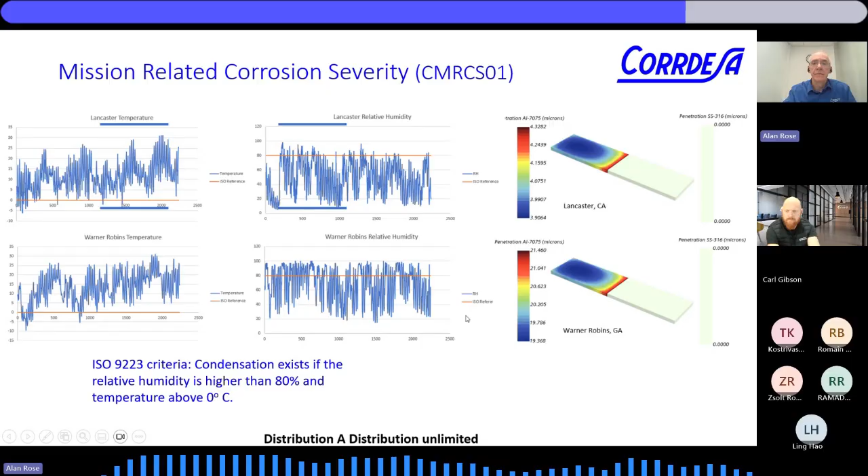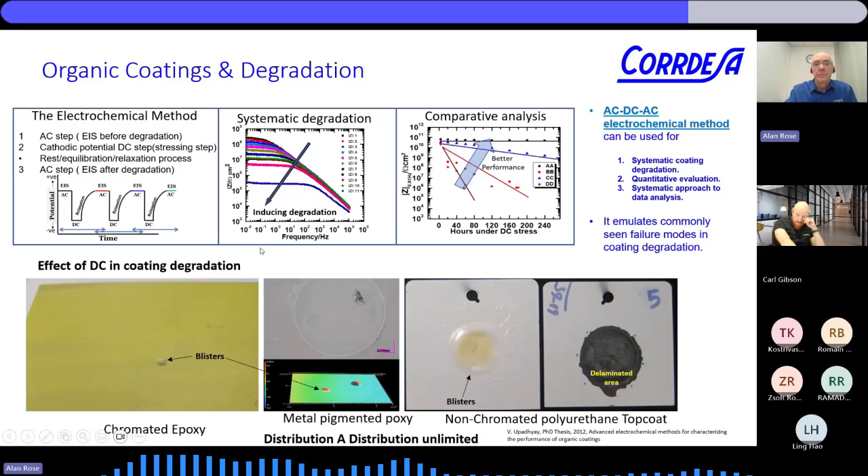And now we're looking at degradation of top coats. We have a technique for acquiring data on organic top coats, and we can insert this experimental data into our model so we can look at the degradation of the top coat.

Then the ensuing galvanic corrosion of the inorganic coatings underneath. Even though all these different coatings follow the same spec, they all performed widely different. Our lab technique that we've developed ranks them in the same way, and we do it in a few days rather than a very long time. If you can then incorporate that data and apply it on your new 3D plans for the next bomber, the next air taxi, whatever, then you can see how well your system performs.

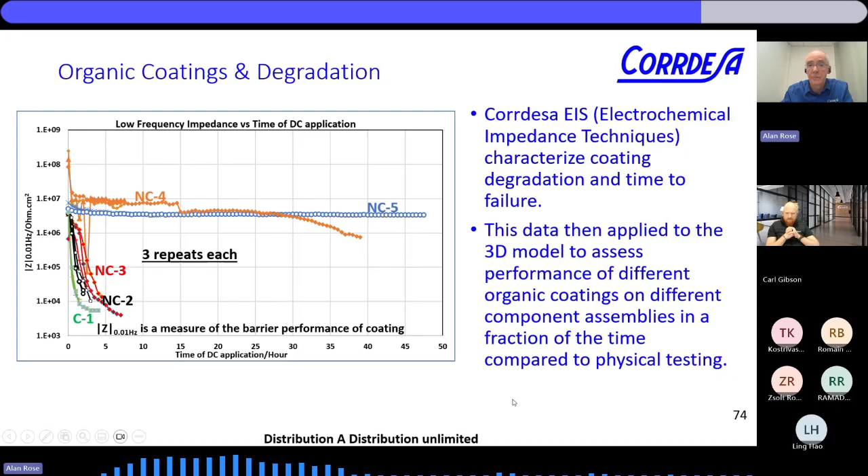So to conclude, the standards changed. They went from a potential series to calculating the galvanic current. That essentially means the use of polarization data, so this mixed potential theory, so you can get a much more accurate handle on corrosion rates between galvanic pairs.

We incorporated that to automate it into a CAD system, so you could do it over hundreds and thousands of interfaces automatically. Then we incorporated the polarization curve database into a 3D solver, and inside that CCM plus solver we used, we can calculate the corrosion rate over these. It doesn't take long before, with 2 or 3 coatings and multi-material, multi-body assembly, it soon gets quite complex.

And I think this is the approach to adopt. I showed you how we can locally plate and anodize and also strip corrosion, and many more processes can be mobile and non-drip to take right to the asset.

So, Carl, I'll wrap it up there and take any questions.

Excellent, great work Alan, it was good. I liked some of the facts that you were putting in there - 23% of failures in aircraft relate to corrosion. That is high. Yeah, I'm quite surprised by that.

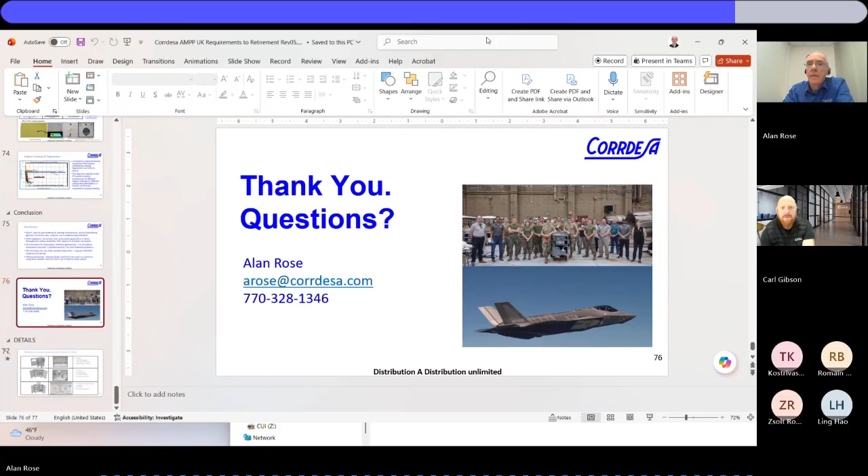Yeah, we've got a couple of questions, I'll do them in order. So the first one came in from Tassos - it's just loading. How does the Corrdesa model work? Do you identify or model severity of corrosion, or estimate corrosion rates? So what was the bit before you said, or estimate corrosion rates? Do you identify or model severity of corrosion, or estimate the corrosion rates? Is it written down? Yeah, flip over to the Teams chat, and then it's in the Q&A. There we go - how the Corrdesa model works, to identify model severity of corrosion. What is the corrosion rate?

Okay, so I talked about the polarization data. Polarization data is a nice way of looking at the galvanic corrosion because it's fast - we don't model the actual chemistry. It's possible to do that, but we don't model the chemistry. We capture that information through this polarization curve. What's a polarization curve? It's kind of a function of the material and its environment. So essentially, you're limited to modeling environments for which you've got the data. So that's one thing, but it's very, very fast.

So our database of all polarization curves are taken according to a standard. We just have this single triangular matrix of all these polarization curves for different materials and coatings, according to a reference, saturated calomel. And so then we can compare one material with another. So it's not like fixed corrosion rates - the MIL standard has done the calculations for you, and if you ran our engine, you get the same.

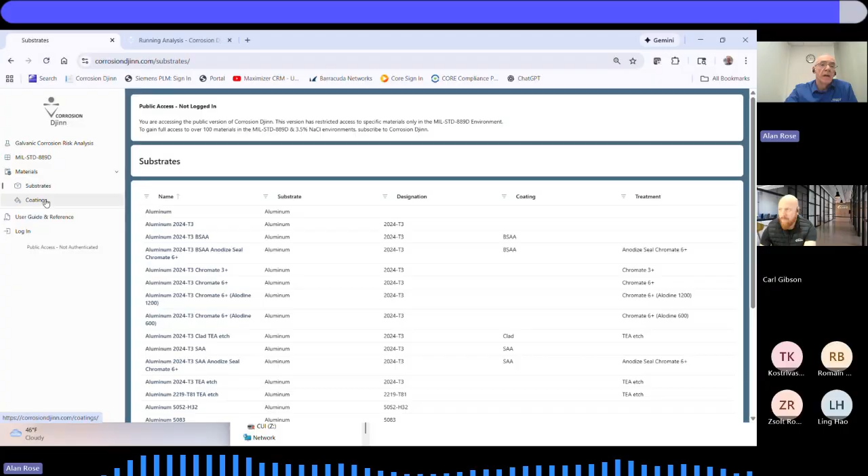And you click this materials, we have substrates, coatings. You can click on them and see what we have. You click on the individual coatings, you won't get much information because that's encrypted and for users. However, it's interesting to see the extent of our data. But if you go to the galvanic corrosion risk analysis up here...

You can select an environment. At the moment we just have the MIL standard. We have just a few materials—active aluminum, more noble titanium—just so that people can kick the tires and so on. So that's our immediate go-to if you want to give it a go. And then if people want to do calculations with the bigger database, we can evaluate it, and there's other ways of moving forward. But I found this very useful.

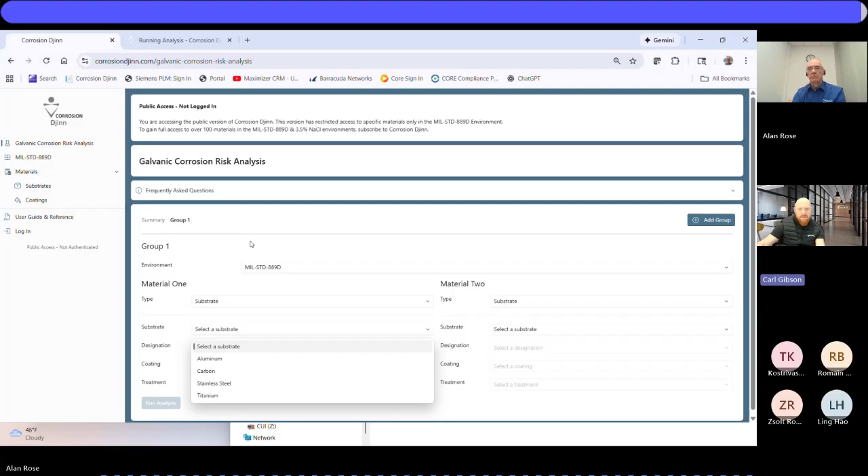Perfect, I don't think there's any more questions. Just want to thank the people on the line for joining us, and thank you for your time, Alan. I wish you safe travels on your way north, during your road trip around the UK. Yeah, thank you very much, Carl. Thank you all, and any questions, just reach out to me. Fantastic, thank you, Alan. Okay, take care. Holiday, take care. You too.